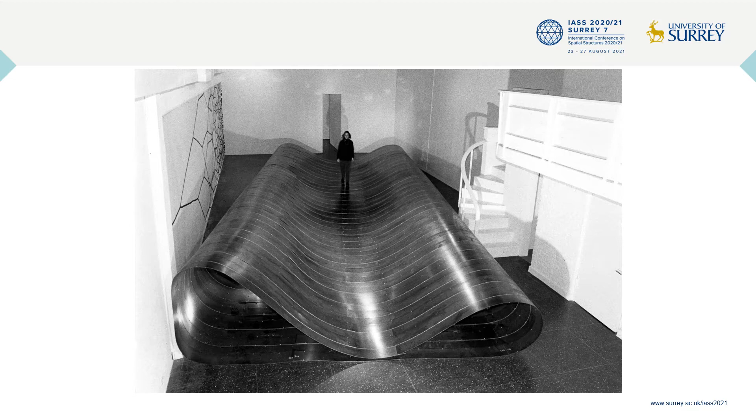Our proposal for IASS 2021 has its origin in these sculptural works, a series of manually designed and assembled structures composed of both flexible materials and connections that allow these dynamic systems to exhibit a range of behaviors. These structures performed in a crude fashion like natural living organisms. They were only semi-predictable and, much like a plant, could vary in form depending on the environment in which they were sited. As in nature, these variations were not indiscriminate and could only take on forms prescribed by the genetic or structural code inherent in their material and construction.

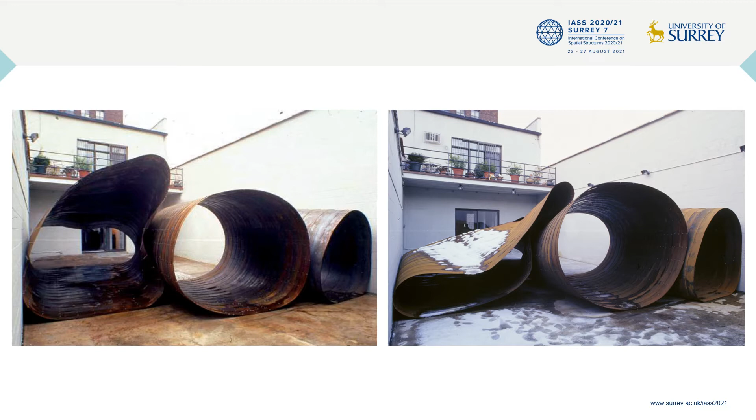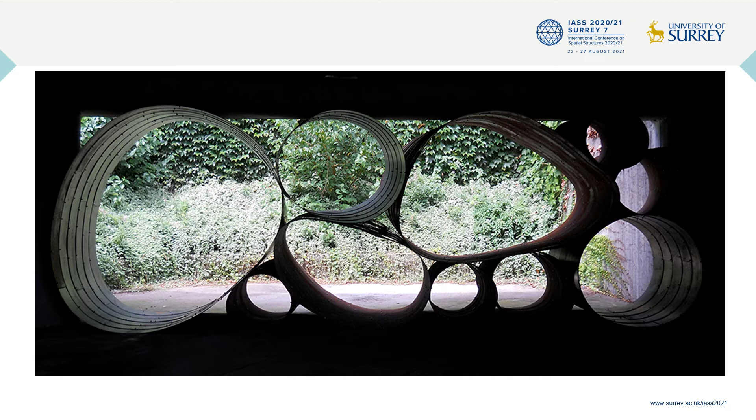Here are before and after images of Driggs following a heavy snowfall at the Black and White Gallery in Brooklyn, New York in 2002. A direct iterative process informed these works, exploring ways to preserve or alter the system's behavior through simple modifications, such as using a single thickness of material but varying the cylinder diameter, multiplying the number of cylinders in the system, or varying the material thickness in individual cylinders. The process was intuitive with little formal engineering, and the forms were limited to linear, fence, or wall-like arrangements.

As the scale and complexity of these works grew, it became clear that there was a need for more control and understanding to undertake these installations safely and to discover the next step in the evolution of the work. In 2012, with Daniel Bosia of AKT II and mathematicians Thomas Tucker of Colgate University and Tomasz Pisanski of the University of Ljubljana, we received a grant from Colgate University's Picker Interdisciplinary Science Institute to explore mathematical methodologies for art and design. We worked to develop methods to generate ideas and forms comprised of a set of digital tools and physical processes for form finding.

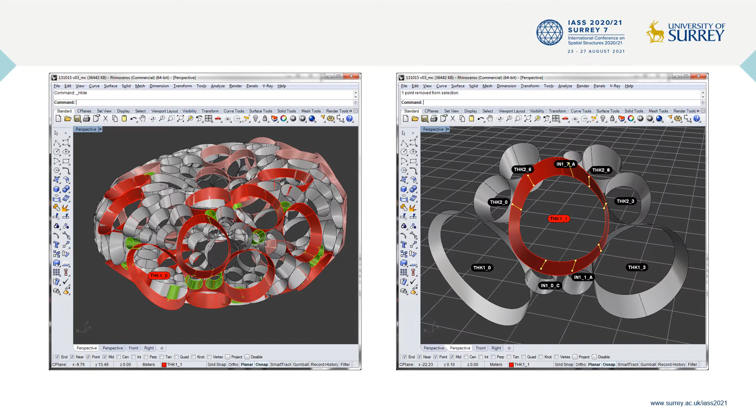Over a 3-year period, our research culminated in the design, fabrication, and installation of Odin on the Colgate campus. The methods created during our research project built on the physical ways form emerged in the earlier work. These newly developed digital tools made it possible to break away from linear arrangements, allowing us to pack conical sections on complex surfaces. What distinguishes our work from that created through more fully automated processes is digital invention and precision coupled with material imagination and expressiveness, both areas of expertise meeting in a space of semi-predictability where cutting-edge digital forms are resolutely handmade.

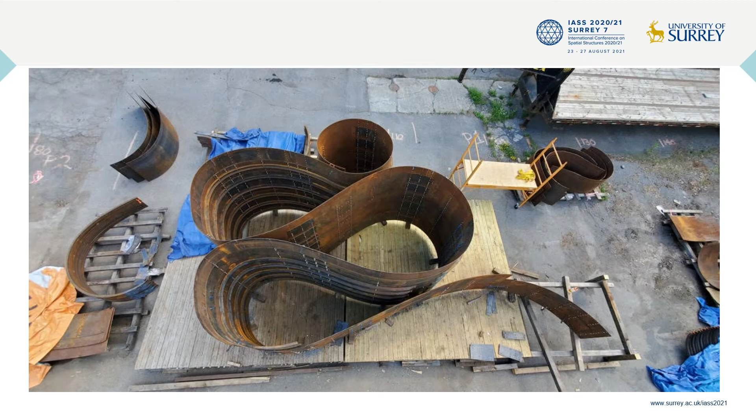Across all of these projects, a series of themes have emerged: material behavior, spatial connectivity and packing, and the relationship between component and assembly. As our understanding of the structural behaviors that govern these systems has grown, the complexity and scale of subsequent sculptures has been able to increase, and new ideas have been introduced that morph and reformulate these relationships. For the second half of our presentation, Joel Hilmersson will provide more detail on the evolution of the computational methodology and introduce the Guildford Riband. Pictured here is Eastgate under construction, an example of our new ribbon typology.

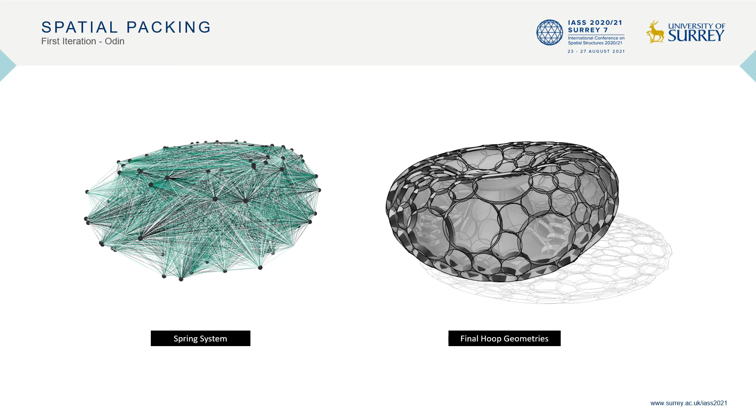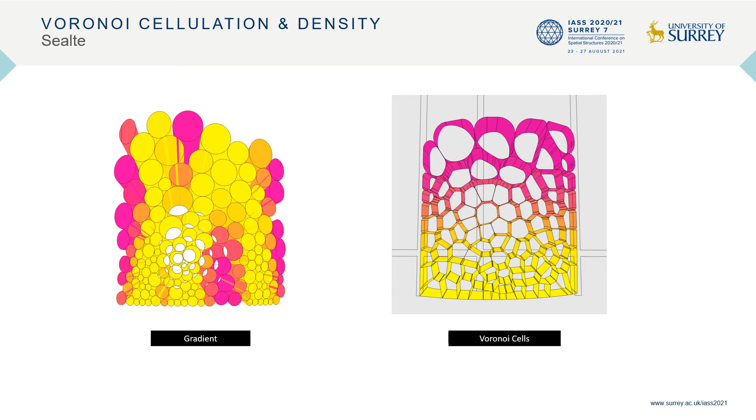A problem that presented itself during the design of Odin was that the packing was not perfectly cotangent. To resolve this, for a subsequent sculpture, additional steps were introduced in the form of a Voronoi cell division, followed by a smoothing process. This was set up to ensure coplanarity at the connection points.

The algorithm used for Odin had been successful, but in later projects it lacked flexibility as the artist desired a finer control. Therefore, during the Inspire project, the Kangaroo implementation was substituted with a custom process.

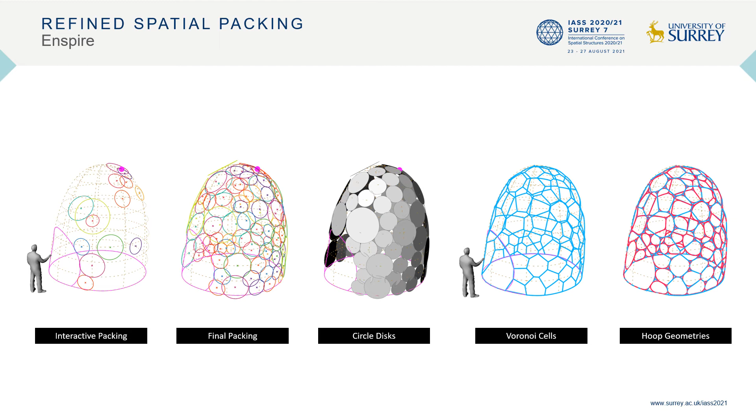This process has been slowly expanded upon and now allows, for example, for circles to dynamically adjust their radius and for the artist to intuitively add additional ones, both while the process is running. This aims to replicate the process of the earlier, more informal cylindrical sculptures in a digital context.

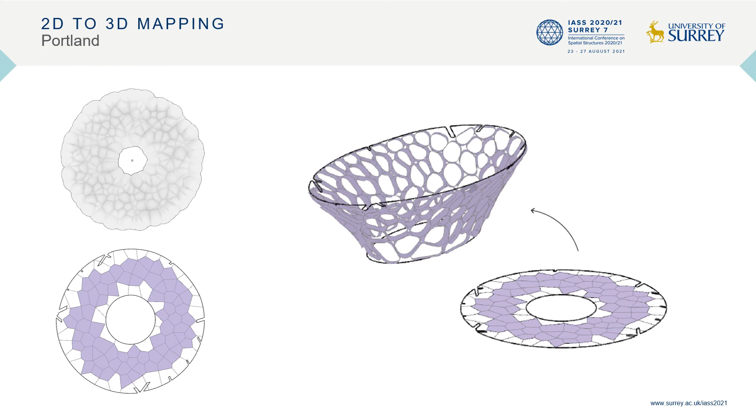A more recent problem that has emerged is how to deal with complex boundary conditions, for example in the ongoing Portland sculpture, which interacts with external geometric constraints. Here, the control surface is mapped into 2D space for the packing, and then remapped back into 3D space for the physical hoop generation.

The proposal for the IASS pavilion continues the development of these projects by extending them with 2 new directions. The first direction is how to link the form and behavior on a global scale in terms of structural performance. The base form has an inherent stress distribution which depends on geometric features such as apertures. This can be found through an initial FE analysis using the surface as a shell.

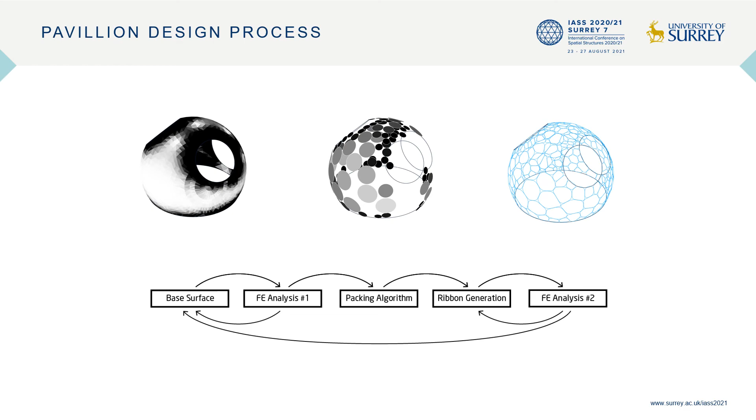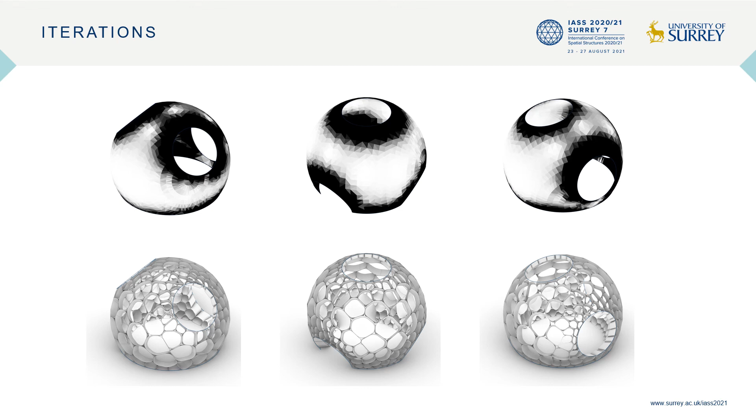By representing the distribution as a grayscale gradient, it can be used in the circle packing process. The circles in the packing then readjust locally with an awareness of the relation to the global behavior. Regions with higher stress get a higher density of material as the circles in these areas reduce their radius and pack tighter. This creates an interconnection between global features and the local components through the overall behavior. Using different base geometries with different stress, a wide range of similar yet distinct options could be tried.

The second new direction is the introduction of a new typology in the form of an elastic, continuous ribbon made from polypropylene. Ribbon geometries are generated from the cell division by combining sets of hoops into topological clusters. The steel hoops roll into an explicit form, but there is an inescapable elastic nature to the components, and these topologies can be understood in relation to their self-forming behavior.